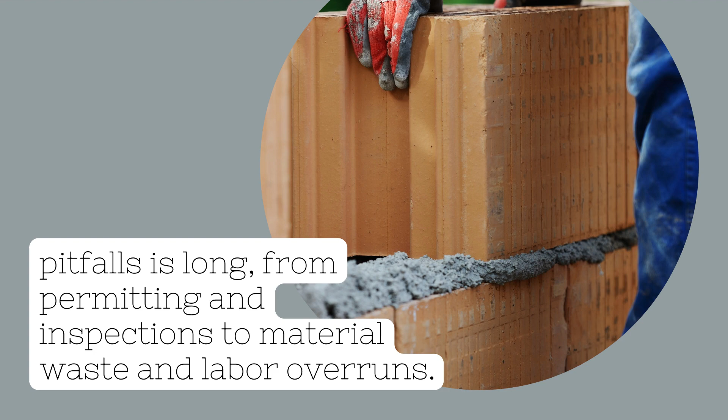One can say that there are no hidden costs, per se, only costs that are unknown to you personally. You can easily run into construction projects that may bust your budget with all those costs you did not know about, but then all that comes down to your experience level.

To keep hidden costs in check, and to provide a cover for your business, insurance in construction projects should never be ignored. We will take a closer look at some of the most common hidden costs of construction, and how you can avoid them. Poor design.

This is one of the most common and also one of the costliest hidden costs in construction. A poorly designed project can lead to a host of problems, from material waste to safety issues. The best way to avoid this cost is to work with a qualified architect or designer who can help you create a well thought out plan.

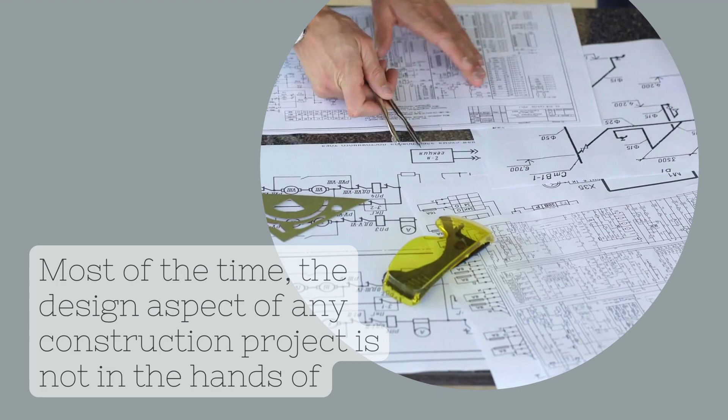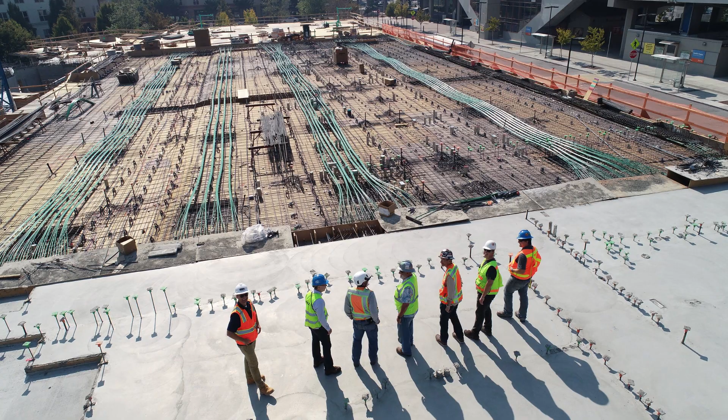Most of the time, the design aspect of any construction project is not in the hands of the contractor, and they are basically given a design to implement. This is the contractor's responsibility to check the design before taking on the project. If in the haste of securing a contract, you neglect design or are unable to see it through, then a

single poor design has the potential to bankrupt a company. It is advised to just step away from anything that you and your team cannot understand or you have doubts over the capability of your team to implement any design.

Inadequate project management. Another hidden cost of construction is inadequate project management. This can manifest itself in several ways, from missed deadlines to poor communication between the various parties involved in the project. The best way to avoid this cost is to make sure you have a qualified project manager who is experienced in managing construction projects.

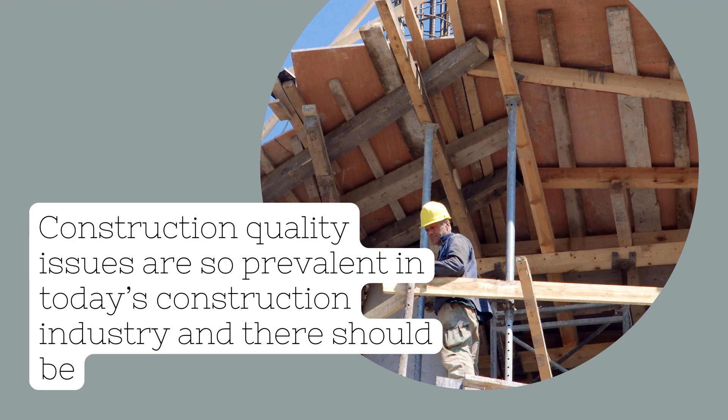Hiring an experienced and successful project manager may fall heavy on the budget, but that decision alone can save your business from a lot of trouble and make every project profitable. Construction quality issues are so prevalent in today's construction industry, and there should be a lot more focus on quality of work than just meeting deadlines.

Unforeseen circumstances. One of the most frustrating hidden costs of construction is unforeseen circumstances. Here is a brief list of these obstructions that will only delay your project.

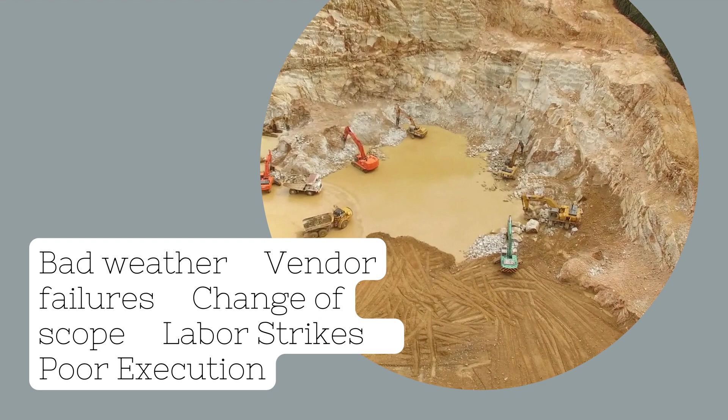Bad weather, vendor failures, change of scope, labor strikes, poor execution. The best way to avoid this cost is to plan for the unexpected and build a contingency into your budget.

Last-minute changes. As you were about to hand over the site, there came additional requests and changes that will not only eat up a lot of your time but will also fall heavy on the budget. These can include everything from design changes to material substitutions.

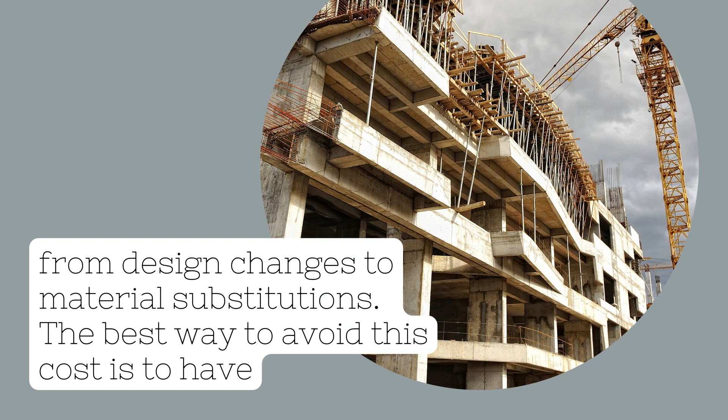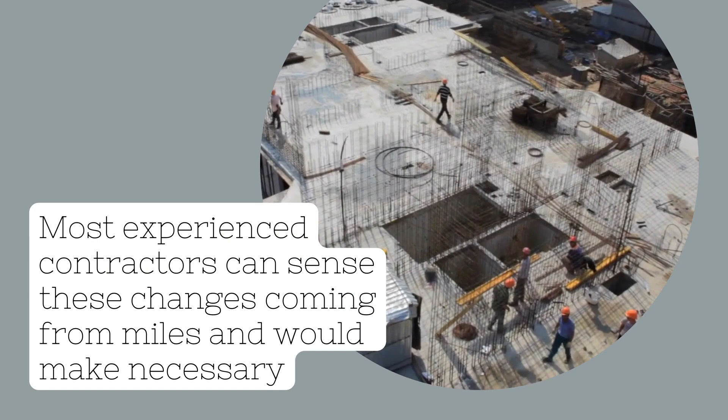The best way to avoid this cost is to have a well thought out plan that takes into account all potential changes that could occur during the project. Most experienced contractors can sense these changes coming from miles and would make necessary considerations during the construction.

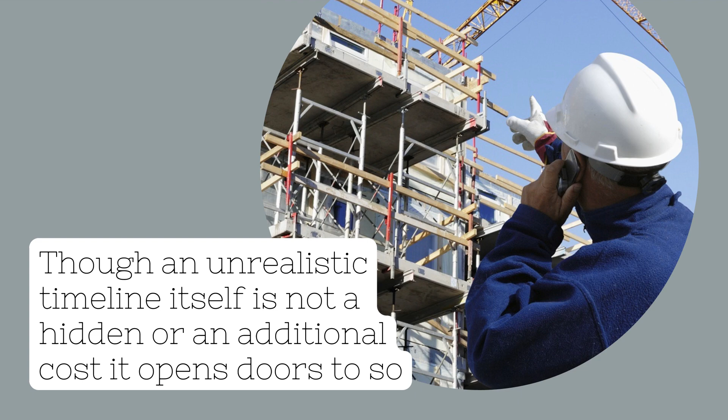Unrealistic timelines. Though an unrealistic timeline itself is not a hidden or an additional cost, it opens doors to so many costs that your project may well be declared a failure.

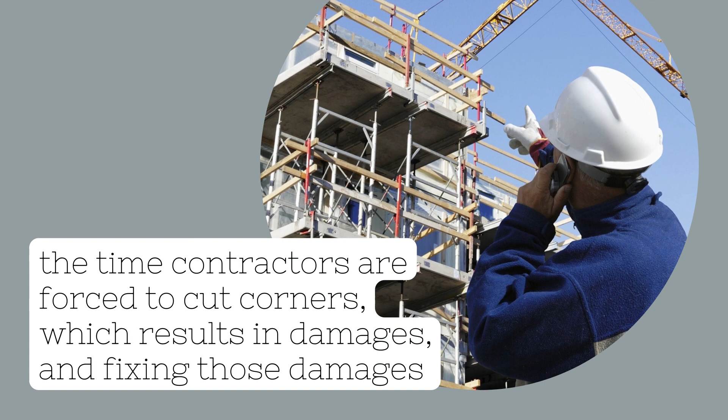Due to tight scheduling, most of the time contractors are forced to cut corners, which results in damages, and fixing those damages is way costlier than getting them right the first time.

Accidents. Though we wish you may never run into any accidents, they are bound to happen in any construction project. From breaking tools to machinery, there are hundreds of possibilities of anything going rogue. Now, if you are not covered with insurance for some reason, this cost may eat up all of your profits.

Hence, it is necessary to have proper insurance coverage for all aspects of your construction business. Read Insurance in Construction to understand what you may have at stake.

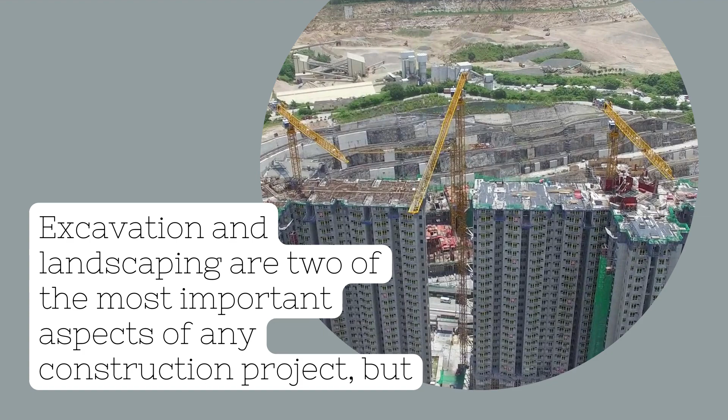Excavation and landscaping. Excavation and landscaping are two of the most important aspects of any construction project, but they can also be two of the most expensive. Proper site surveys and accurate cost estimations are needed to avoid these additional costs.

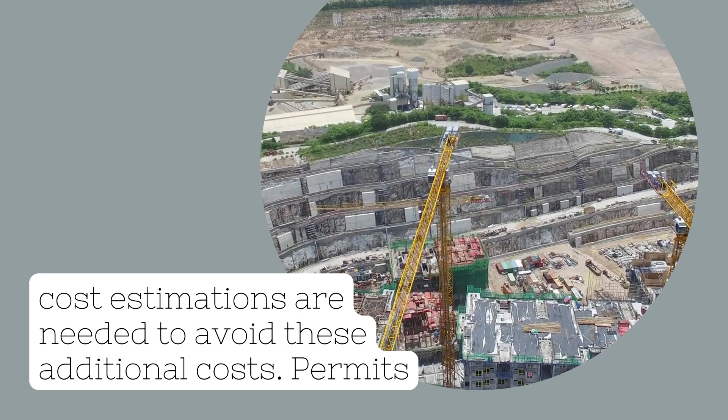Permits. Now, this is something that may halt your project even at the kickoff phase. In many jurisdictions, you need to obtain a permit before you can begin any work on a construction project. The cost of the permit itself can be significant, and in some cases, you may also need to pay for inspections as well. Besides federal laws and requirements, you have to abide by the state rules and regulations. A proper understanding of all these rules and regulations is necessary for you to even take on a project.

Billing and taxes. Contractors overspend over 8% on materials due to billing mistakes and improper taxation. The implication of federal and state taxes on different materials would confuse anyone, and usually, accountants are the ones who make these judgmental errors. For that purpose,

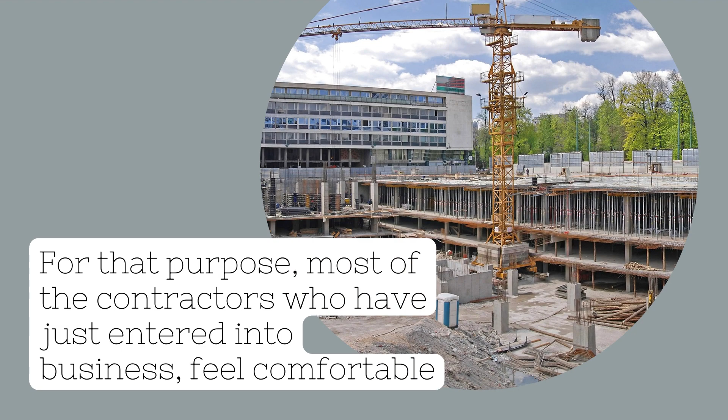Most of the contractors who have just entered into business feel comfortable staying in one state. However, by taking services from a taxation firm, you can easily overcome this issue and avoid future mistakes.

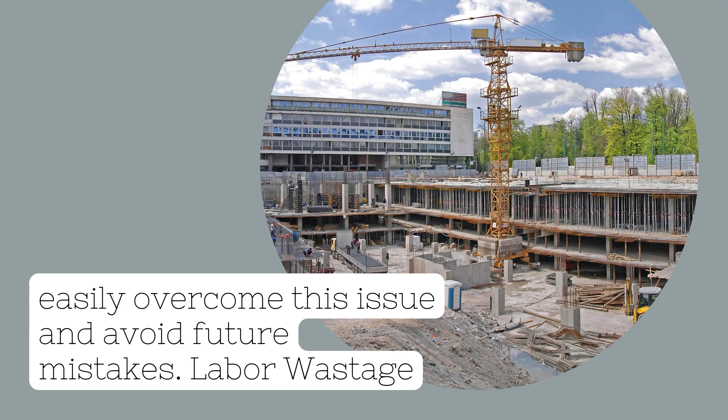Labor wastage. Thousands of labor hours are wasted while waiting for something to happen. This could be waiting for the materials or waiting for the new instructions. Usually, labor wastage is associated with individuals, but most of the time this happens while labor is willing and ready to take on the next task. Labor waste can easily be avoided with proper communication and by setting up a small set of processes and goals.

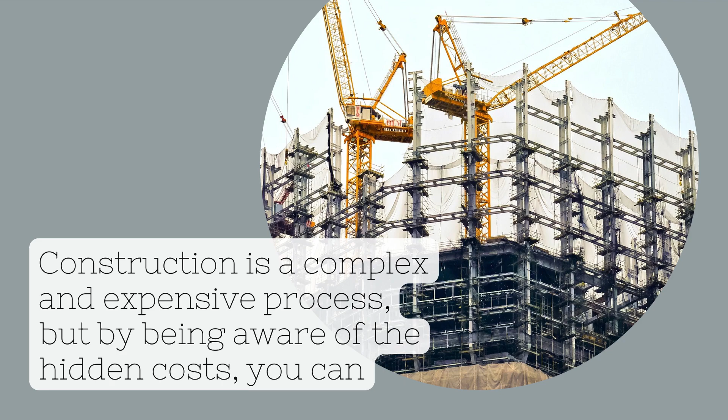Conclusion. Construction is a complex and expensive process, but by being aware of the hidden costs, you can avoid them and save yourself a lot of money. Do your research, create a realistic budget, and have contingency plans in place to avoid any surprises. You can ensure that your construction project stays on track and within budget with careful planning.